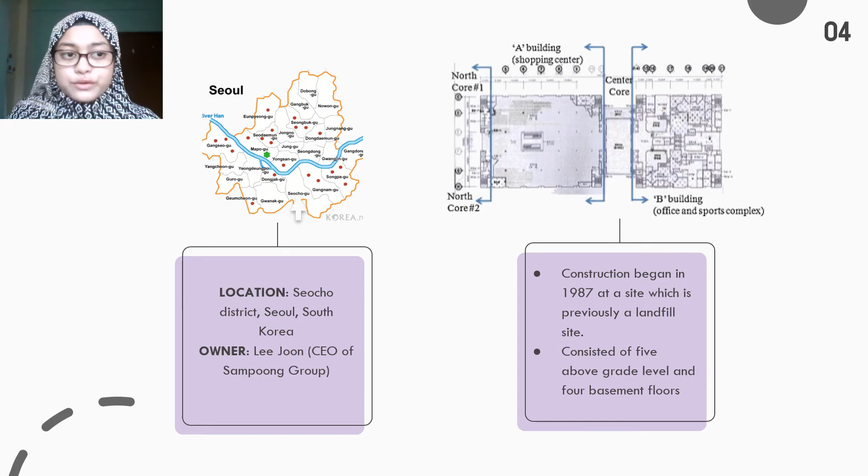Next is the timeline of building failure. In 1987, the construction of this building started. It took 2 years to complete this building after switching the contractor and bribing. On 7 July 1990, the mall is publicly opened.

In 1993, the store management received a lot of complaints from tenants of neighboring buildings about the noise from the air conditioning system on the top floor. Therefore, they relocated the air conditioning system by dragging it. The weight of the air conditioning system was 4 times heavier than the building could cope with. Thus, after 2 years, minor cracks start appearing.

On 28 June 1995, at 8 a.m., the number of cracks in the area increases. Then, structural engineers declared that the department store is no longer safe to operate and needs major repair. At 12 p.m., the building manager turned off the air conditioning and closed the top floor.

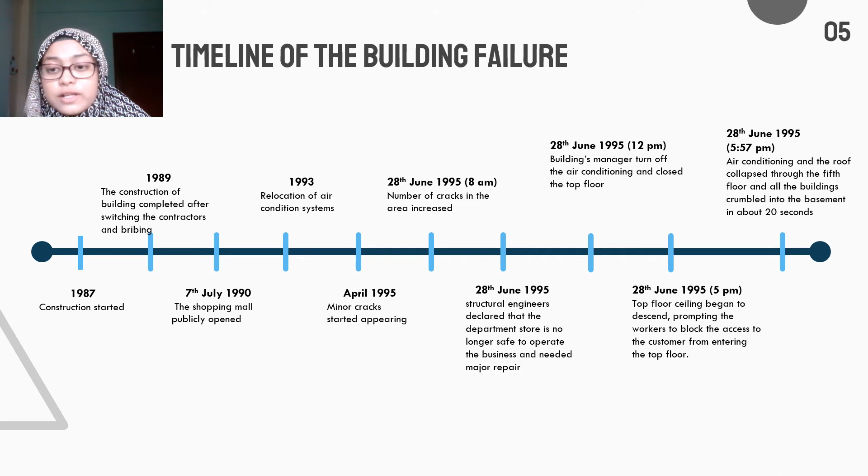At 5 p.m., the top floor ceiling began to descend, prompting workers to block access for customers entering the top floor. At 5:57 p.m., the air conditioning unit and the roof collapsed through the 5th floor, and the entire building crumbled into the basement in about 20 seconds.

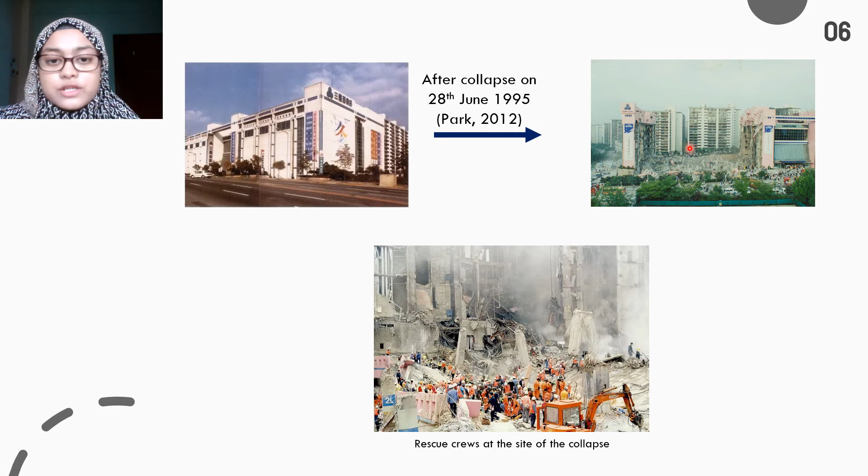This photo shows the Sampoong department store before collapse and after collapse on 28 June 1995. This incident killed 502 people and more than 900 people were injured. This disaster also resulted in 270 billion won worth of property damage, which is approximately 364 million USD in 2020.

Thank you, Fatin. I'm Gaya Amina, and I proceed with the technical failure. Based on the investigations that have been done, these were the reasons for the collapse of the building.

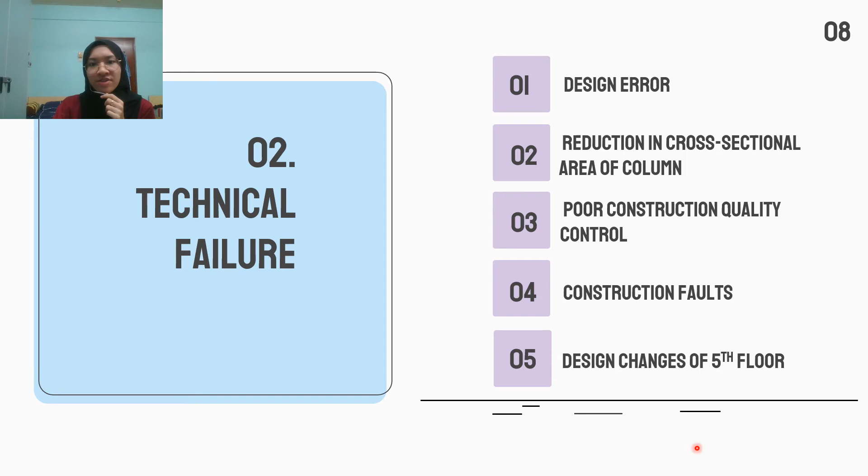First, the design error. The initial design calculation of the roof concrete topping was 1.9 kPa, but the actual load was 4 kPa. This is because the engineer did not consider the installation of the cooling facilities in the calculation. The condition became even worse when the impractical way of moving the cooling system from one location to another was applied, causing the occurrence of punching shear. They used rollers on plates to slide and push the cooling system instead of using a crane.

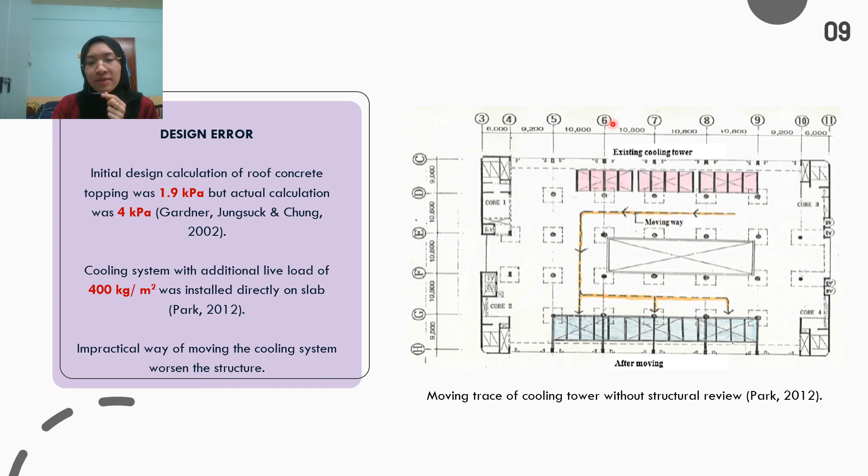Next is the reduction of cross-sectional area of the column. The size of pillars C1A and C1B from the 2nd floor to 5th floor was supposed to be 80 cm diameter with 22 mm of 16 sets of reinforced bars. However, the actual size of C1A and C1B at the 4th floor and 5th floor was 60 cm diameter with 22 mm of 8 sets of reinforced bars, which does not follow the blueprint. This means the cross-sectional area and the strength of the reinforced bars were reduced to half.

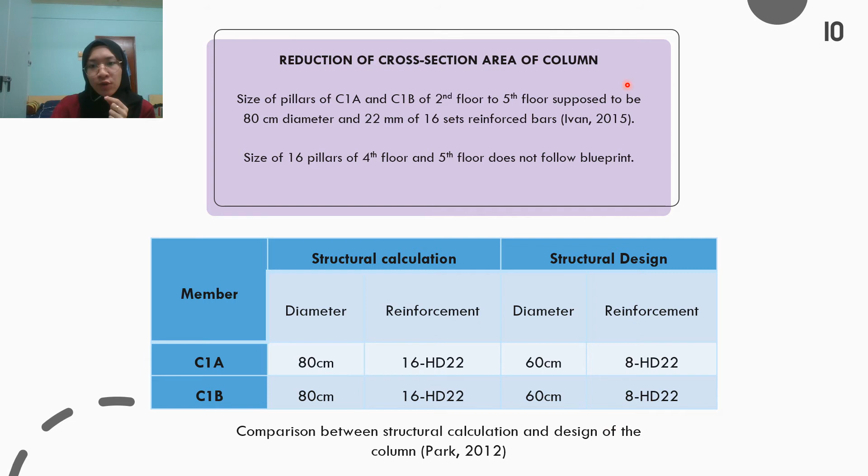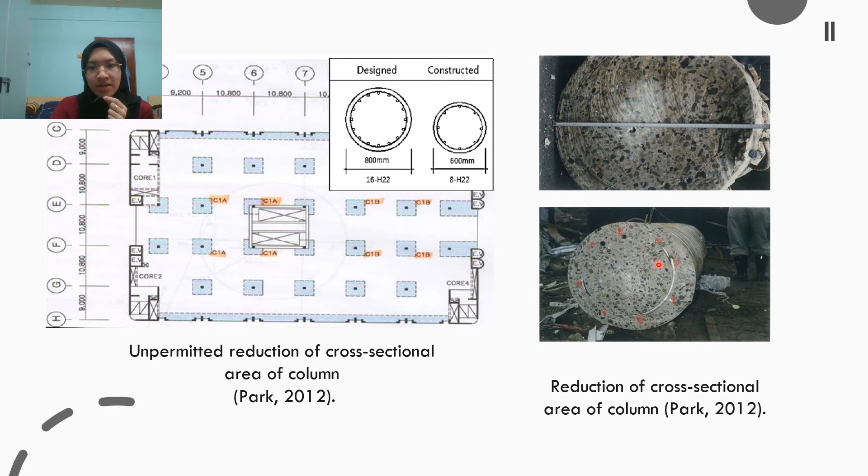This is the location of the C1A and C1B. This is the proof that the pillars have been reduced to 60 cm with 8 sets of reinforced bars: 1, 2, 3, 4, 5, 6, 7, 8.

Next is the poor construction quality control. An examination of the drop panel in row 8 and column B on the 2nd basement floor and the broken concrete surface of the slab shows the boundary panel between the slab and drop panel separated smoothly and horizontally with 3 layers of laitance, showing a wrong construction method was applied, resulting in poor construction quality.

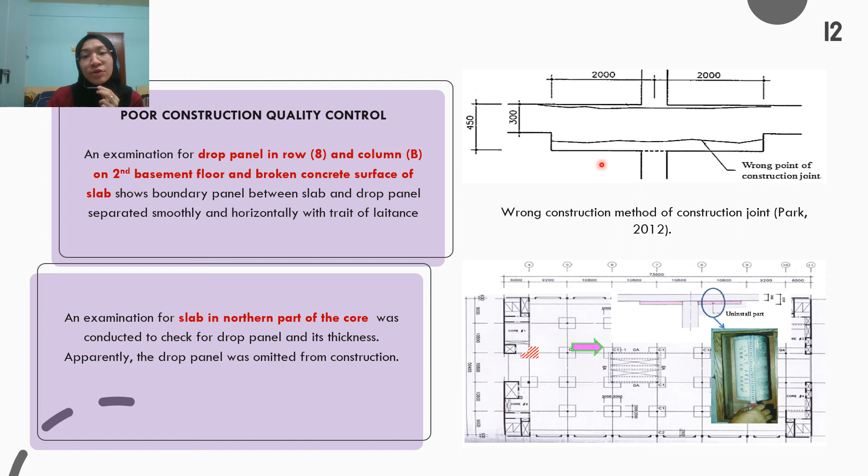An examination of the slab in the northern part of the core was conducted to check the drop panel and its thickness, and apparently the drop panel was omitted from construction entirely. This is the direct factor that caused the building to collapse, as the drop panel plays an important role as a beam in the flat slab structure.

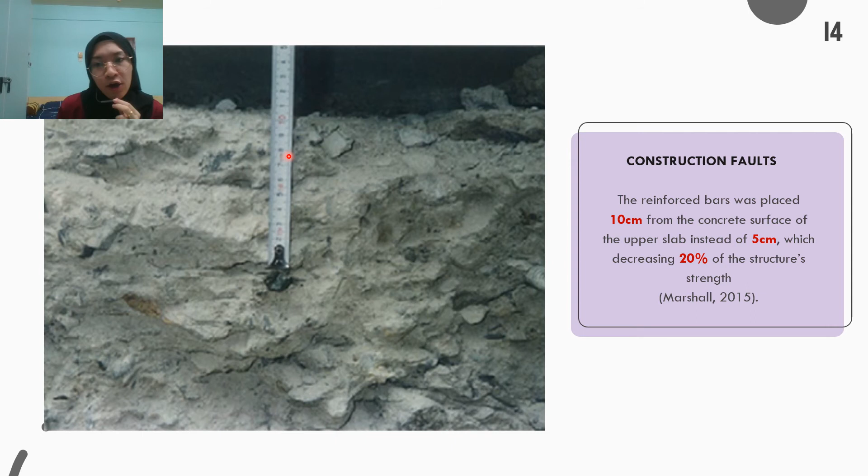And then, construction faults. The reinforced bars here were placed 10 cm from the concrete surface of the upper slab instead of 5 cm, which decreased the structure's strength by 20%.

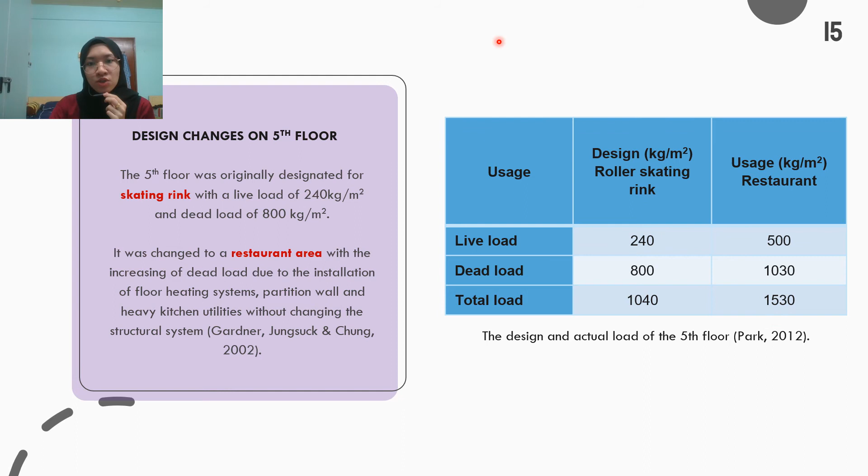And lastly, the design changes on the 5th floor. Actually, the 5th floor was originally designed for roller skating rink, which had a total load of 1040. However, it was changed to a restaurant, which has a total load of 1530. This shows that the actual load is higher than the calculation, which caused a reduction in the volume of reinforced bars placed in some members.

Hi, I'm Adimba, and I will be presenting about the ethical failure in the case of the Sampoong department store collapse. So ethics is about differentiating good or bad, rules of conduct in the community, and also the moral principle of an individual.

So it also applies in engineering, where it comprises the responsibility of stakeholders, including their desirable ideals and personal commitments. The main cause for the collapse was technical failure, but what triggered it in the first place was actually ethical failure made by the stakeholders.

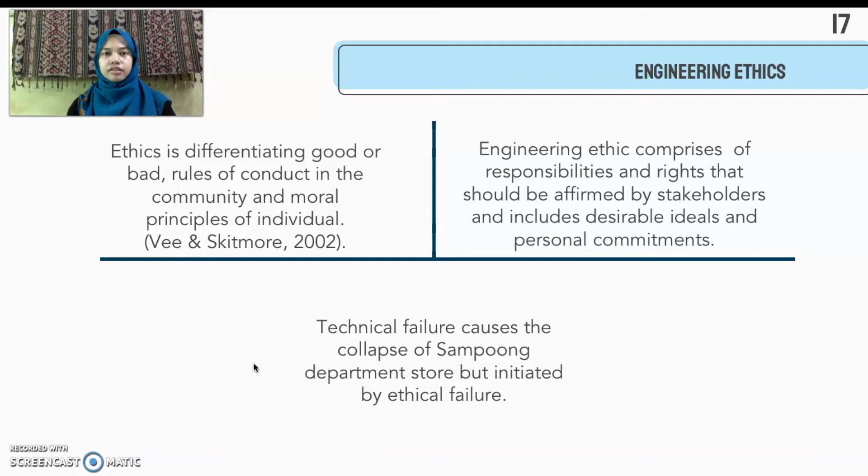The first one is refusal by Woosung Construction. At first, the construction was supposed to be for an office building, but owner Lee Joon wanted something else. He wanted a department store. The modification would cause ill impact, and Woosung engineers did not agree to this.

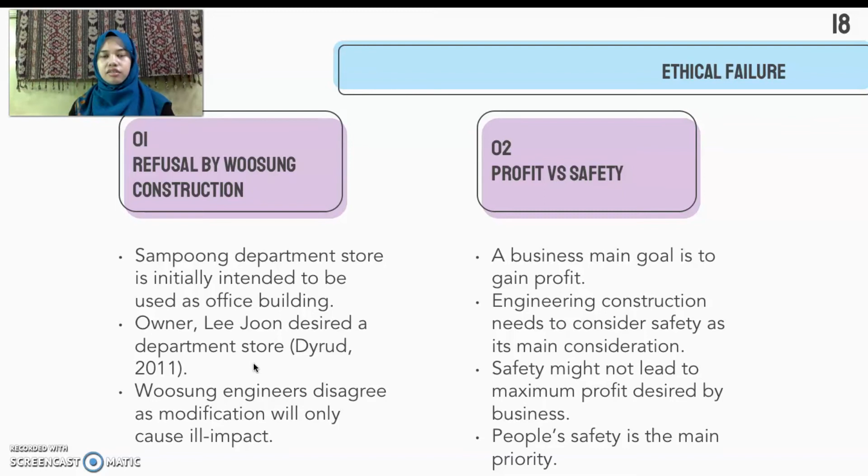The second case is profit versus safety. A business's main goal is to gain profit, but at the same time, an engineering main goal is safety. In the case of the collapse, they failed to prioritize safety over profit.

The third one is poor decision-making practice. The first case was when management did not properly relocate their air conditioning units when they received complaints. The second one is on the day of the collapse itself, they received notice that the building is not safe, but instead of evacuating, they just continued operation as usual, as they were scared they would lose revenue for the day.

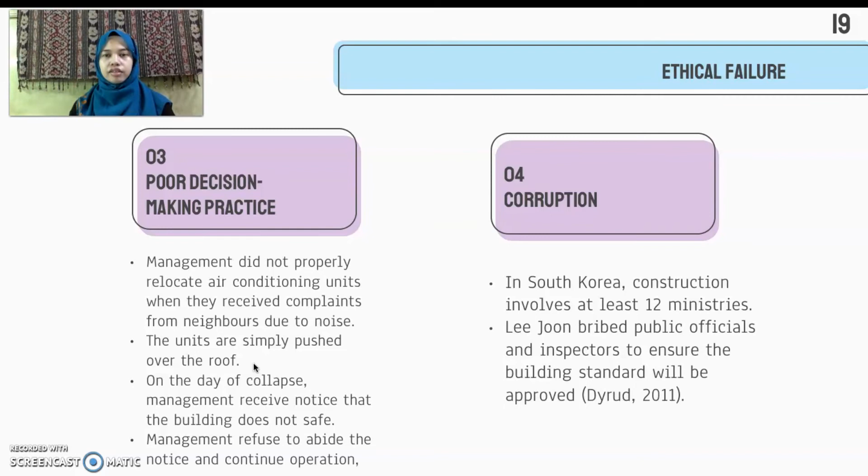The fourth one is corruption. In South Korea, construction involves at least 12 different ministries. But Lee Joon bribed public officials and inspectors to ensure that the building's standard would be approved, even though the standards did not meet standard codes of conduct. So that's all for the ethical failure part.

We'll move on to mitigation measures. Mitigation measures can be separated into two, which are technical measure and ethical measure. For technical measure, basically Sampoong department store will not collapse if proper quality control is in place. What they need to do is apply quality control, which refers to a part of quality management that ensures the building complies with the requirements.

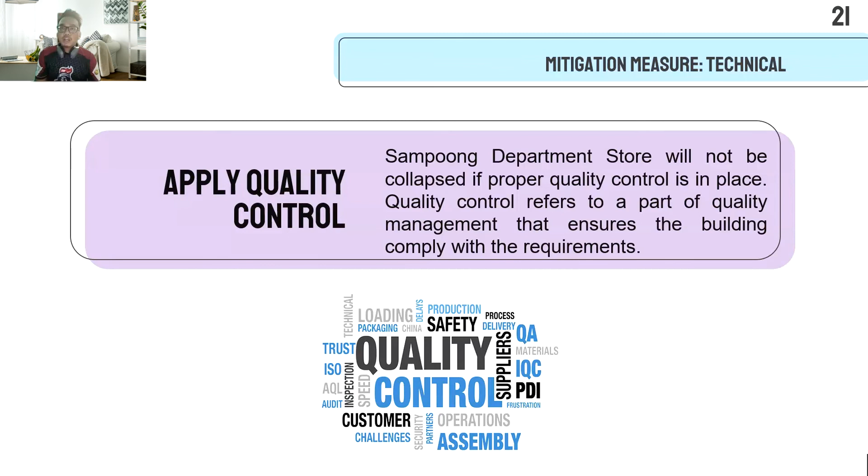There are 4 steps in quality control, which are plan, do, check, and lastly act. For the plan, basically what they need to do is determine quality standards and the requirements to meet the standard, and determine what procedure will be used to ensure criteria is being met.

For the do, basically they need to organize supporting documents such as ISO documents, policies, procedures, and work instructions. Then for the check, basically they need to control, measure, and monitor the outputs to ensure they meet the expected criteria management system, and identify areas where there is opportunity for improvement.

And lastly, for the act, basically they need to review the findings of the quality management system and re-evaluate both process and products.

Another one for the technical mitigation measure is where they need to apply engineering analysis. They need to calculate new values if changes have been made to the design. In this case, as the building had been changed from a 4-level building to a 5-level building, they actually need to recalculate everything to ensure whether the design is in the correct range, and also evaluate technology used and the drawbacks present in the technologies.

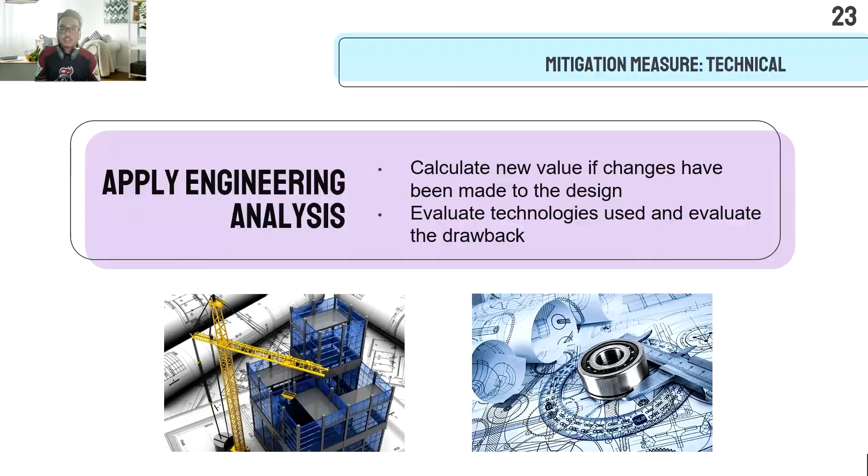Hey, my name is Afiq. I'll proceed with the mitigation measure for ethical failures.

The first one is the refusal by Woosung Construction. The way to tackle this is by strengthening the building codes, hiring honest and high integrity government officials and inspectors, and following clients' requirements without opposing the engineering specifications.

The next one is profit versus safety. Basically, when we want to build anything, we need to consider the safety aspect as the first consideration to be made by the construction management. During construction itself, they need to conduct safety inspections periodically, and the construction management, architects and engineers need to stick to the proper designated plan approved by the engineers.

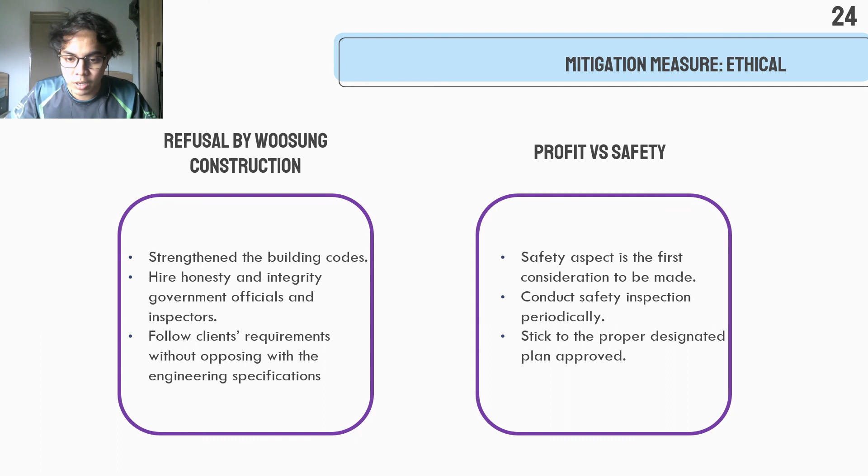The next one is poor decision making practice. The way to handle this is by taking every consultation by engineers seriously, and implementing appropriate arrangement for utilities during construction. Everyone involved in the project should collaborate when doing the planning for construction, so that the best outcome for the decision making can be made.

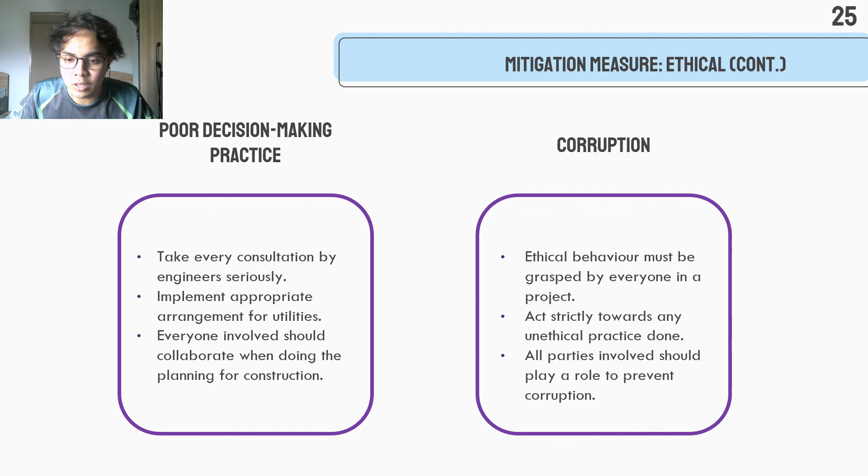The last one for the ethical failures is corruption. To handle this kind of failure, everyone in the project needs to grasp good ethical behavior, and the inspectors and government officials need to act strictly towards any unethical practice done by the construction management, and all parties involved in the project itself should play a role to prevent corruption.

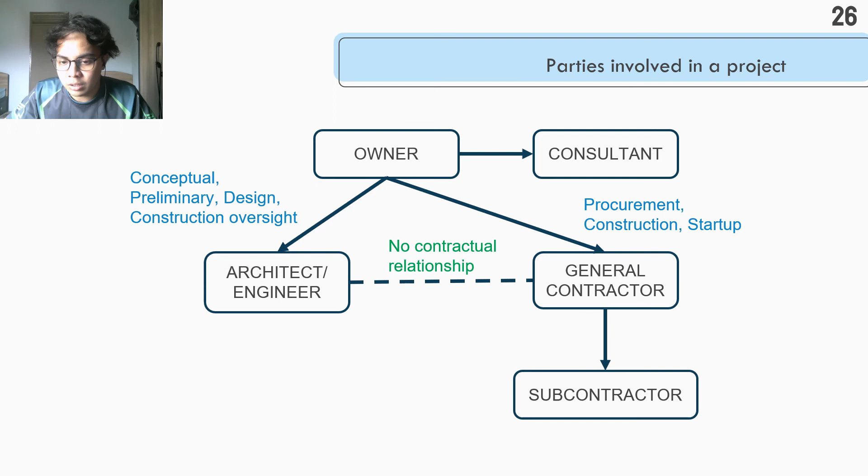This shows the parties involved in a project, where the owner will have consultation with the consultant and also architects and engineer. After a tender has been presented by the general contractor and accepted by the government officials and inspectors, they will proceed along with the subcontractor to build the respective building.

And we have come to the conclusion. Basically, the Sampoong department store was only operated for 5 years before the collapse, and many issues contributed to the collapse, such as design flaws, poor construction quality control, and changes in design by the construction management itself.

This kind of thing can be mitigated by applying quality control such as ISO 9000, known as quality assurance, and complying with international standards. Some of the ethical issues involved in this project are corruption and poor decision making practice, as I described earlier.

The way to handle all these kinds of ethical issues and any other issues is to hire honest and high integrity government officials and inspectors, to ensure the screening and approval of construction is stricter, and to prevent the same incidents such as the Sampoong department store from happening in the future.